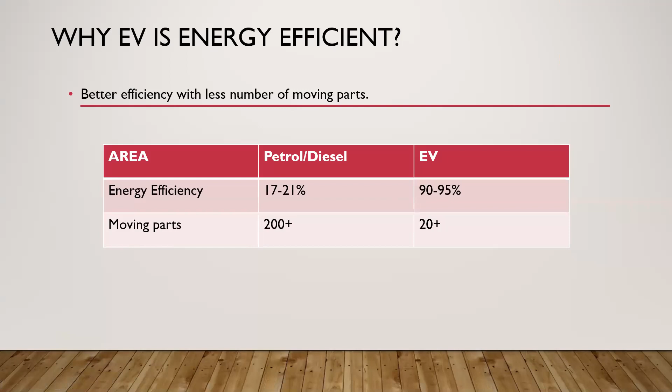Yes, sir. Sorry, your voice is not clear. Somebody is telling. No, from my side it's very clear. I am in a very silent room. Okay. Sir, some other voice is coming. Sir, 1 minute, let me mute. Voice is clear. Okay, please proceed. Please check the participants list, and there you will find whether it's unmuted or muted. Then you can mute that. If somebody by mistake unmutes, you can mute it, sir. Thank you, sir.

Okay. And also in the electric vehicle, there is a braking system termed the regenerative braking system. Let me see how the conventional braking system works. In IC engines, when we apply the brake, the mechanical power given on the pedal is converted to hydraulic power. Then the hydraulic power delivers mechanical power to the brake shoe. The brake shoe stops the rotating wheel by applying friction over it, so the energy produced by the engine is abruptly stopped in the form of heat. While the friction happens, a huge amount of heat is released. In that way, we stop the vehicle.

But in electric vehicles, the regenerative braking system is implemented. How does it work? When the vehicle is rotating at idle speed without any acceleration, if you apply the brake, the motor acts as a generator, so the rotational motion produced from the moment of inertia of the vehicle is generated as power, which is given back to the battery as electricity, so the battery stores the energy for later use. This is the cyclic process.

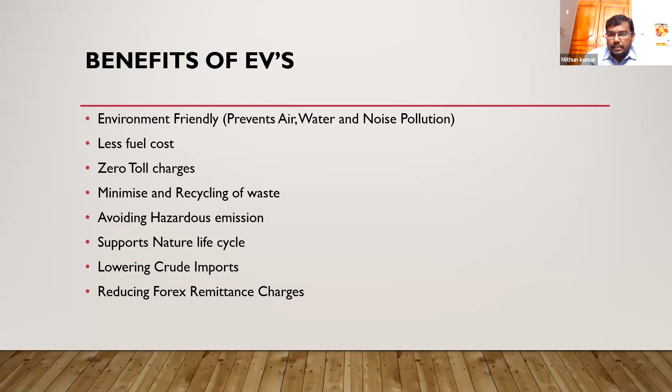The next thing is transportation in India. In India, the road network is around 57 lakh kilometers approximately, and it keeps increasing at 10 to 15% every year. 85% of the total population uses the road. And 65% of the freight, the goods we send from one place to another, also moves by road by means of lorries, trucks, trailers and so on.

It is also one of the largest road networks. If we take the rail network, we don't need to worry about it, because the electrification concept has already been implemented in railway transport. Right now, nearly 75 to 80% of the rail network is electrified. So we don't need to worry about it.

And in air routes, they are preparing alternate fuels to power turboprop engines. They are preparing to use clean fuels like methane, natural gas and so on.

Then we are going to concentrate on this road only. If 85% of the total population is using the IC engine, what will happen? Definitely the pollution will be enormous. The pollution will be enormous, which we can't control at all. So our government is insisting us to switch over to the electrical vehicle because it is less pollution and less cost, and also we can support the environment likewise.

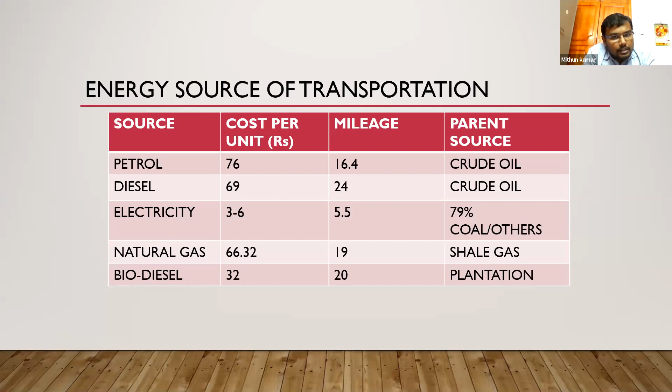But after that time range, the sun radiation gradually lowers, so we can't obtain the full capacity from the solar. So the installed capacity is 40,000 megawatt, but the units that we generated from the solar is only around 18,500 megawatt. This is what really happened.

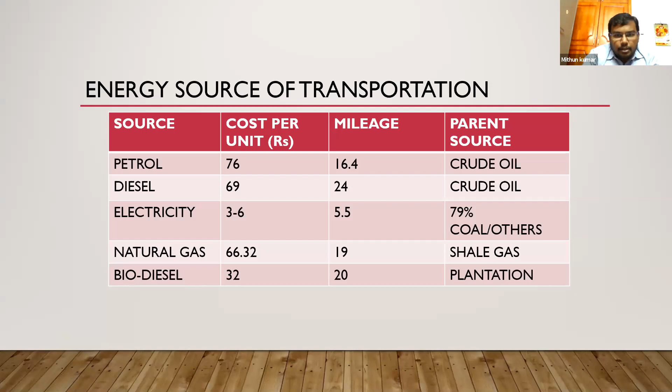And with wind resources, only 6 months can we gain power from wind energy. Likewise, these renewable sources are quite unstable. The only other thing is nuclear. For nuclear also, the support from the people's side is very less, and we can't convince the people because of its hazardous nature.

Then, as I said, 82% of the crude was imported. What the government had planned is to reduce the crude import to 62%. This is a challenging thing they proposed in their last discussions regarding crude imports. How are they going to do this? By introducing electrical vehicles.

By introducing electrical vehicles, they can minimize the crude imports, like this they are saying, and also the point considered to switch over to the electrical vehicle is huge pollution. This is the area we can attack. 87% of the pollution is caused by the road, by emitting greenhouse gases.

Okay, we see why the government is directly switching from the IC engine to the electric vehicle. Why, when in between many options are there? They can try advanced IC engines, mild hybrid IC engines, or full hybrid or plug-in hybrid, but they are not concentrating on this segment. They are directly switching to the electric vehicle. Why? What is the reason behind it?

If you see the advanced IC engines, advanced gasoline is used. What is meant by advanced gasoline? In the BS6 segment, the gasoline that we are using for the vehicle has a very less sulfur content compared to BS4. And also, if you see biofuels, we purely depend on the plantations. That is also quite impossible.

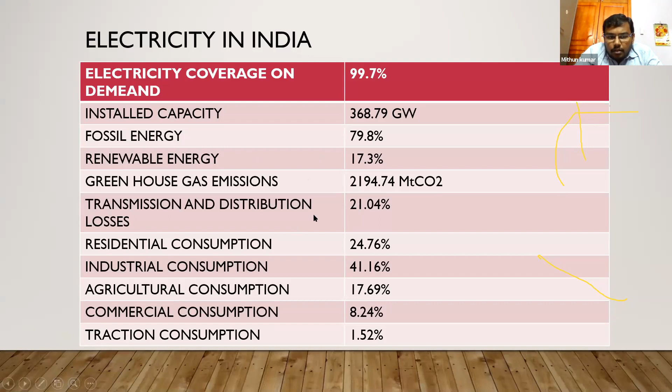So what are the peak hours? When all the industries are running at the same time, from morning 9 o'clock to evening 6 o'clock, the consumption is quite high. The load factor is also quite high. But we are going to charge at night time only. So you can charge the electric vehicle at night time, which is a kind of off-peak time. And also we see the policies and regulations, how the government is supporting EVs.

This is a case study about what the Delhi state government is doing. The Delhi state government is providing a 1.5 lakh rupee subsidy for electric vehicle buyers. They are also planning no-interest loans for electric car buyers in future. It is not implemented, it is under discussion only. And a progressive policy for setting up 100 charging stations in Delhi within a year.

How are these charging stations going to function? These are fast charging stations. If you charge a vehicle, the cost will be lower at night time, and during the daytime the cost will be quite higher. As I already said, they are managing the power demand. At night the electricity demand is quite reduced, so they are creating demand by reducing the cost. And the policies are framed to reduce the oil import bill and reduce pollution, because in Delhi pollution is the main concern.

And also EESL is an electricity-based company. They are going to be a service provider for the charging stations. They signed an MOU with South Delhi Municipal Corporation to provide infrastructure for electric vehicles: fast charging stations, fast charging slots, or battery swapping management systems. They are encouraging people to switch over to electric vehicles and avoid IC engine based vehicles.

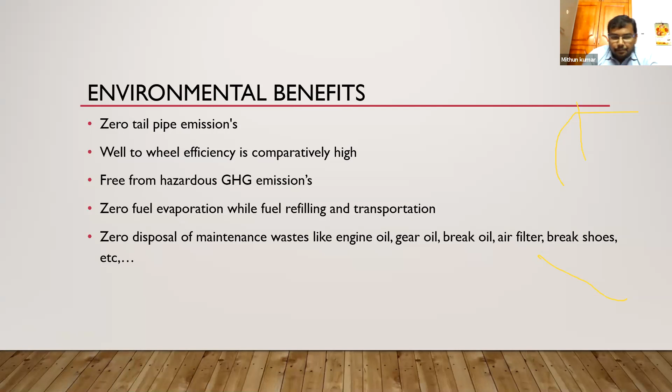Also, in IC engines we have to give the vehicle periodic maintenance or servicing - engine oil is scrapped and changed, gear oil is changed, brake oil is changed, air filter and brake shoes and so on need to be changed after a cycle of operations. This waste is completely avoided in electric vehicles. So there are many environmental benefits when opting for EVs, and also the maintenance cost in EVs is comparatively very low.

When we are switching over to EVs in India, there are four major public sectors - ONGC, HPCL, BPCL, and IOCL - because they are the big shots in the crude oil industry in India. How are they going to switch themselves from that industry? If you see, HPCL purely owns two types of business.

One is the refining business, and the second is the retailing business - retailing by setting up petrol bunks. They are the major distributor. Once EVs evolve in our nation, there will be no demand for crude oil. We can see the crude oil market rate is around 2,750 rupees average per barrel as on today's rate.

So if HPCL, BPCL and these public sectors are purely dependent on crude oil, they will definitely become loss-making businesses. So what they have planned right now is to prepare themselves to produce renewable sources of energy. They have invested 19 crore rupees in 3 wind turbine generators, 3.75 megawatt, with wind power installed in Rajasthan.

46.75 megawatt, and another 50.5 megawatt wind power, plus HPCL biofuels. This is purely for CNG purpose - methanation plants are for CNG purposes. What are they going to do with this? If you see, if any person wants to start a retail business under HPCL, Hindustan Petroleum fuel retail business, they definitely want to invest some amount in the electrical charging station.

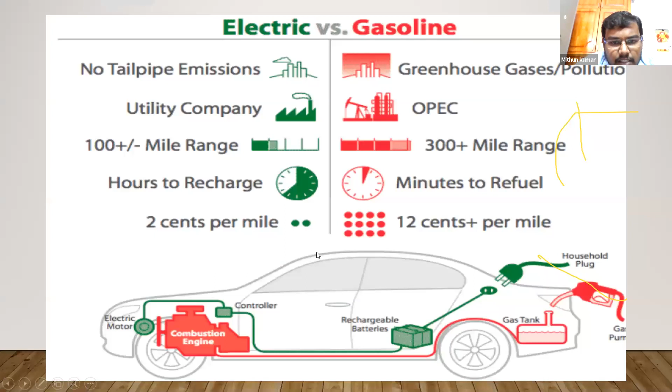Any research is going on, sir, that's introduced in battery? Actually, research is going on, but it takes some more time. The problem they are facing in fast charging is, if you keep on charging your battery in a fast charger, the battery life will be blown out. It will go off, so the life expectancy of the battery will be very less. To avoid that, they are introducing the battery swapping idea.

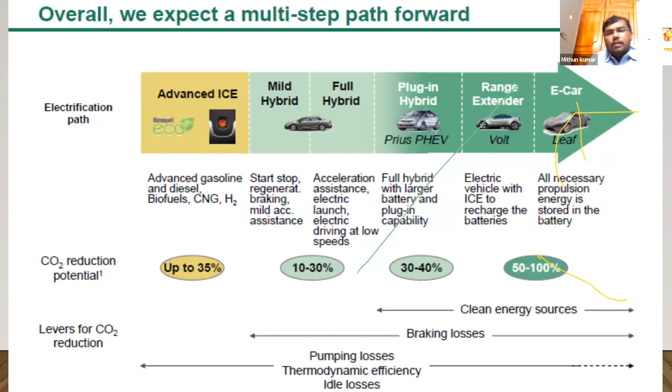Actually sir, this motor can act both as a torque generator and vice versa also as a generator. While you are giving electricity to this motor, it will generate torque. That torque will be given to the wheel based on the demand. Demand means in what speed you have to travel, you are going to press the pedal, so depending on it, electricity will be discharged to the motor and the motor will discharge the torque to the wheels. But while you are applying the brake, the pressure given on the brake, whether you are going for progressive braking or sudden braking, because of the pressure given on the pedal, the motor will create an electricity demand.

This generator will create electricity demand. So this amount of power should be again produced from the generator and given back to the battery. So it requires some rotation motion. The rotation motion given by these wheels will be taken as an input mechanical energy to the generator, and the current will be again regenerated and stored in the battery. This is what is happening, sir.

Here you mentioned some transmission must be involved in that, no? Yeah, I can see something in the drawing. Yes, sir.

Sir, how can it stop the vehicle? How can you stop the motor, sir? If you press the pedal, you apply the brake, suddenly it will stop the motor, so how can it work? Actually, sir, the motor will consume electricity when you are pressing the accelerator pedal. When you take the legs from the accelerator pedal, there will be no electricity. Oh, okay. The car will move on the moment of inertia gained from the past energy. Okay.

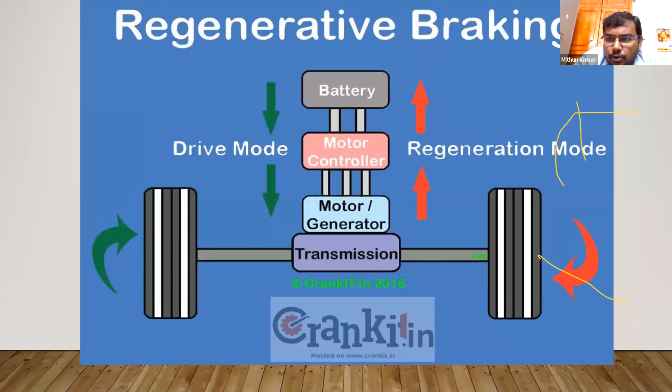Sir, what type of batteries are mostly preferred in EVs? Purely lithium based batteries, sir, because right now lithium based batteries are high power saving batteries, the capacitance of the lithium battery is quite higher. In previous days, with liquid cell based batteries, to get 1 unit of current it requires around 10 kgs of battery, but in lithium it is less than 2 kgs. Thank you, sir.

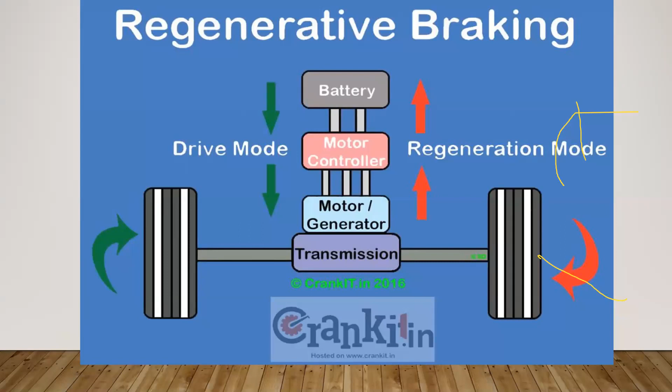Sir, what is the minimum cost of an electric vehicle available in India now? You can see the presentation, I think, sir. Hello? Yes, sir, I'm listening. Right now, these 5 models are available in the market. Mahindra E-Verito is 10.4 lakhs. It's the cheapest vehicle. Its maximum speed is around 86 kilometers and 11 to 12 hours charging. Okay, thank you, sir.

So this charging station, you have listed some 3-4 chargers. Can we have only some part of the chargers? For example, I want to have a charging station only for 2-wheeler or 3-wheeler. Can I set up only for that? Exactly, sir. You can go for the Type 2 AC charger and the Bharat DC charger. In Bharat DC and Bharat AC, you can use the power capacity available in domestic low tension lines, from the home connection also. Okay, that's good.

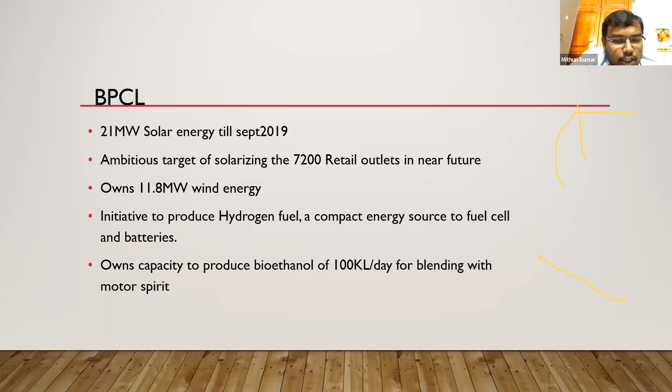One more question. Apart from regenerative braking, is there any other braking, any emergency braking? No, sir, there is no emergency braking like that, because regenerative braking is quite efficient. It's proven. Have you heard about the Delhi metro train, Chennai metro train? They are using regenerative braking only. By using regenerative braking they are able to stop a train of huge weight.

Sir, actually regenerative braking is only for controlling the train. I'm from railway. Mechanical braking is for stopping the train; regeneration reduces the speed. It's only for controlling the speed. Yes, sir. In metro trains the brake shoes are also there, but only to stop the train at idle conditions, to bring the speed to 0. Am I right? Yes, sir. Okay, sir.

Any other questions, sir? This swapping station, is it not complicated to change the battery, and how fast can it be done? Battery swapping can be done within 2 to 3 minutes, sir. That's it. It's like refueling your car.

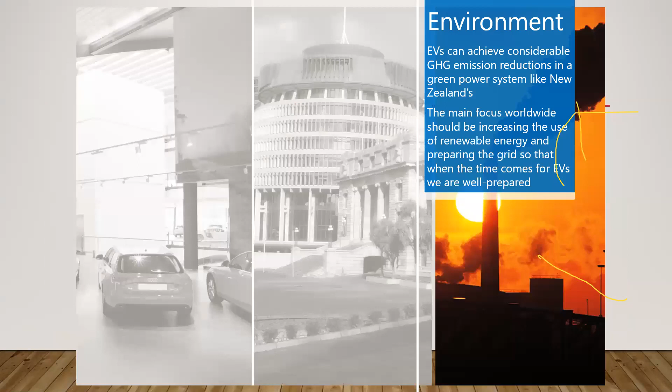Sir, actually, one question we have received in chat box. Yeah, okay. Sir, is it possible? Hello. Yes, sir. I'm listening to you only.

Please tell. Okay. So, sir, is it possible to charge the vehicle with solar and wind energy both? Yes, sir. It is possible, but the only thing is how we are going to draw the power from there. If you are going to set up a wind turbine of around 1.5 megawatt capacity, or else you can go for the micro wind turbine also, you can charge the electric vehicle, but some additional equipment should be used, like an inverter or power management. Likewise, some electrical equipment should be used to convert the power for your mode of usage.

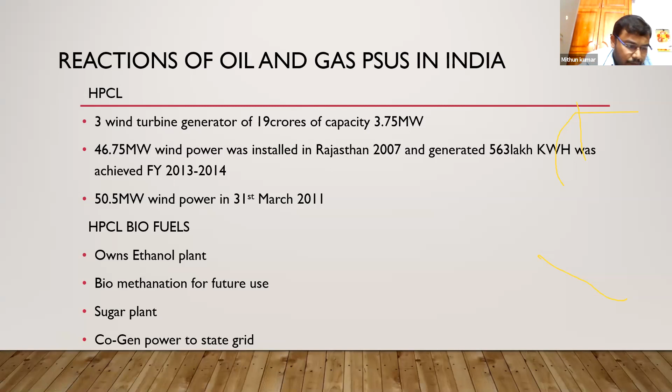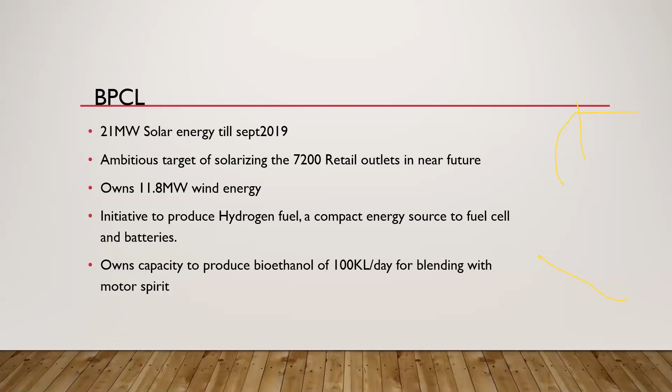Okay, sir. And the second question I will take: how much energy can be generated by applying the brake in an electric vehicle? By applying the brake. Yeah. It differs based on the weight of the vehicle. If a vehicle weighs around 1 ton and is traveling at a speed of 40 kilometers per hour, some energy will be there. That means the rotational motion given to the wheel will be there, and only that can be retrieved. You have to calculate it from the weight of the vehicle, the speed, the size of the wheel, and the capacity of the motor to generate the power. We have to check it out.

Okay. And the third question I am taking is: explain pedal in regeneration, braking, and acceleration. What pattern? This question, sir. Shall I repeat, sir? Please repeat it. Explain pedal in regeneration, braking, and acceleration. Same pedal. Yeah. Explain pedals. P-E-D-L. That was the question we received. I can't get what you are saying.

The pedal means there is one for braking. Only two pedals will be there. Say in a car there are A, B, C: accelerator, brake, and clutch. In this, the clutch will not be there. A is for the accelerator pedal and B is for the braking pedal. Same only.

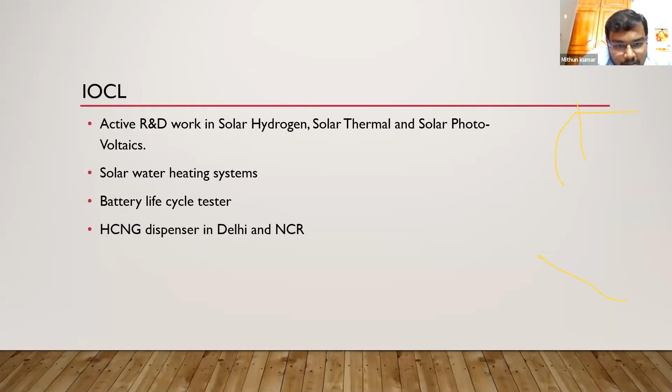Possible. Right now, Audi, BMW, or Benz have launched vehicles that reach a maximum speed of around 250 km with electric power. They are offering electric vehicles for racing purposes. How can you say it is impossible? But one Audi car costs some lakhs to some crores. Can this technology be used in hundreds of firefighting trucks and ambulances? Is it possible to make this technology cheaper?

We can make it. Whenever a technology reaches the market in very small quantities, definitely it will be quite costly. But when the same technology is used by many people, the cost will be reduced because of mass production. So when competition reaches the market, definitely we will see lower prices, right, sir? Yeah, exactly. It's like the concept of launching a mobile phone in the Indian market.

At the time of launching the mobile phone in the market, you can see only high-class people could own a mobile phone in their hand. Right now, you see, the market has become saturated. Even a daily wage person can own an Android phone in their hand.

Sir, another thing is that today all the major e-vehicle manufacturers have turned their ideas to automated driving systems. Is there really any deep connection between automated driving systems and electric vehicles? Whatever the industries were, they have started to concentrate on automated driving systems. Why are all people suddenly switching from electric vehicles to automated vehicle systems? All their prototypes display the same thing in the taglines or in the ads. Is there any deep connection between both?